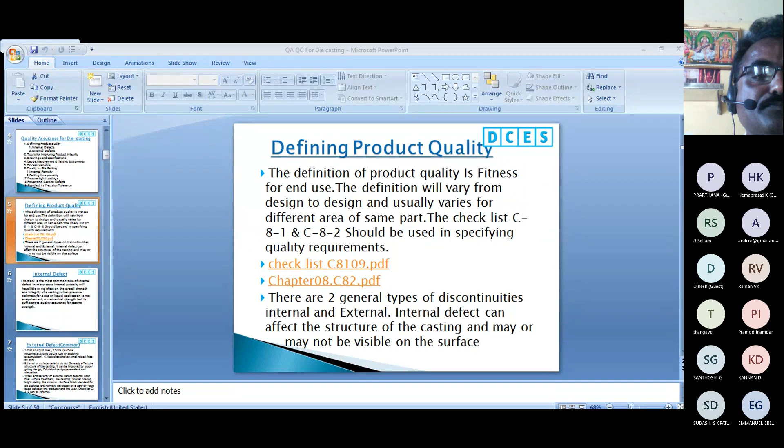Can you see? Yes, sir, please. Now I'd like to show the checklist.

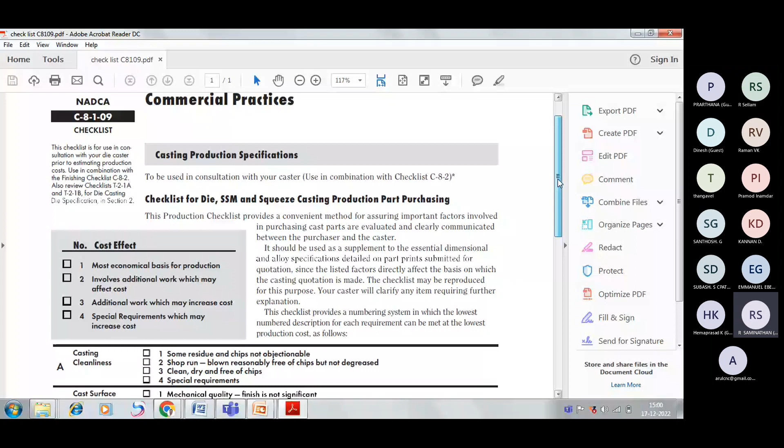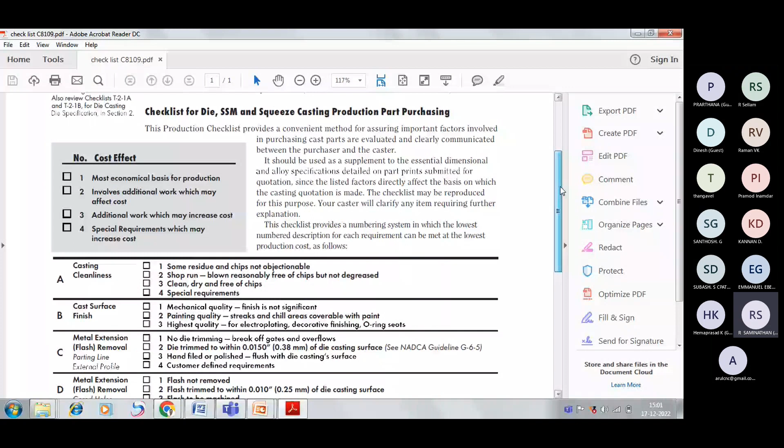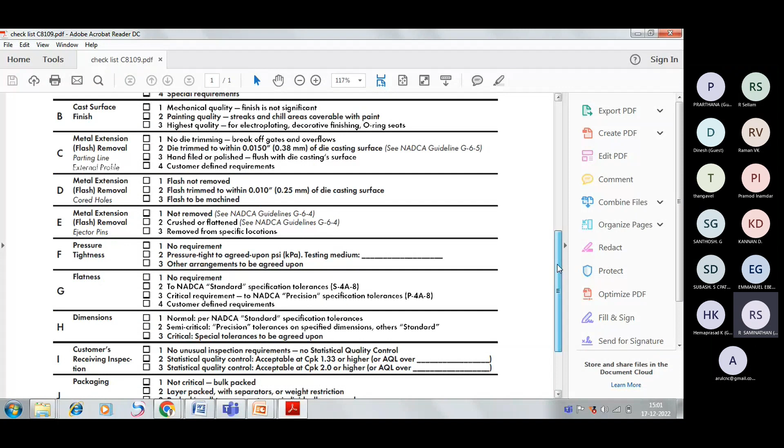So this is the checklist for the casting product quality specification. We cannot go through the full data here, but this kind of checklist, number C8109 from NADCA, can be used to define the quality, like casting cleanliness, casting surface finish, metal extension, flash removal, core holes, and things like pressure tightness, flatness, dimensions, etc. So many things are available here. From this checklist, we can use it to define the quality.

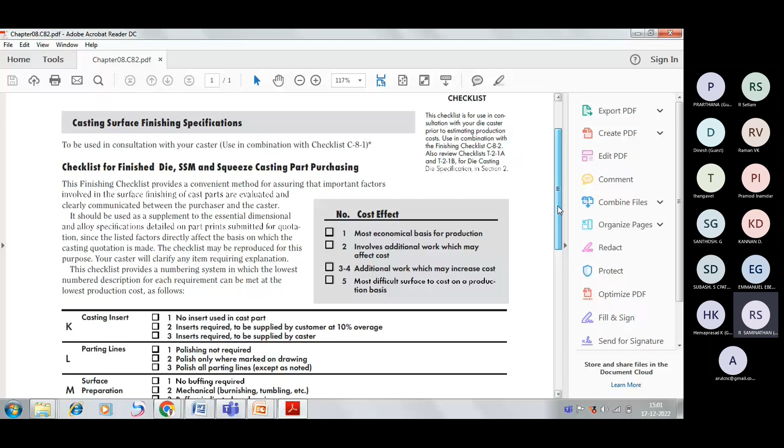So another checklist, this one also for casting - specific casting surface finish, casting insert, parting line, surface preparation, plating, anodizing, or other special finishing, painting, etc. NADCA has given many checklists that can be used.

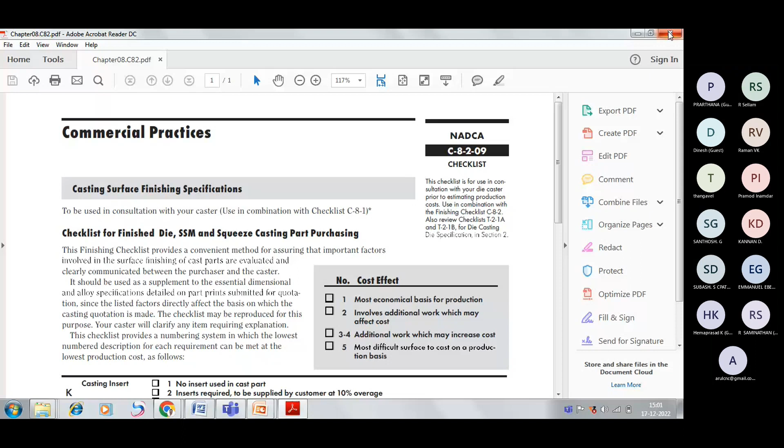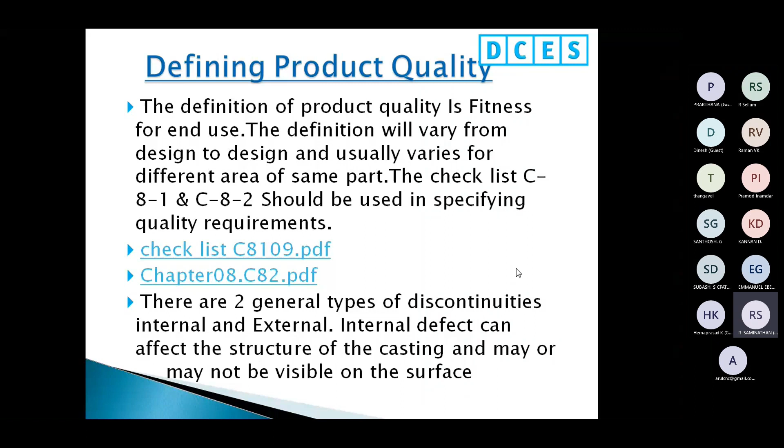There are two general types of discontinuities: internal and external. Internal defects can affect the structure of the casting and may or may not be visible on the surface. Porosity is the most common type of internal defect. In many cases, internal porosity will have little or no effect on the overall strength and integrity of the casting, when pressure tightness for gas or liquid specification is not required. Otherwise it is very important - the mechanical strength test is sufficient to qualify quality assurance for casting strength.

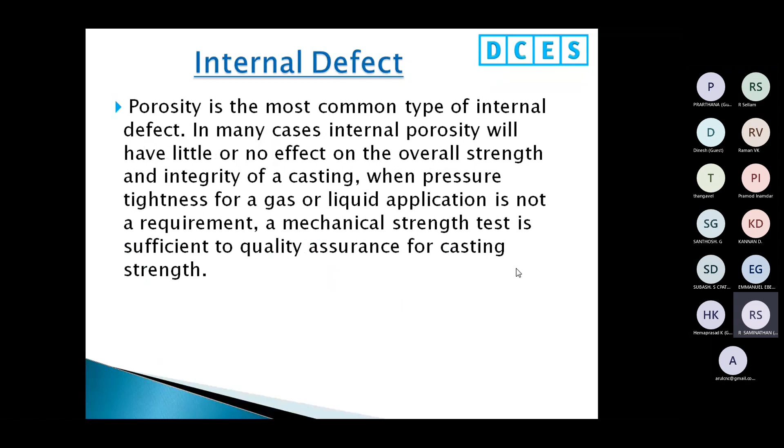Wherever the quality requirement asks for leak testing or pressure testing, it is very important to define the porosity level or internal defect. External defects, commonly called cold shut - that is knit lines, incomplete fill, snirls, surface roughness, build up, die soldering accumulations, heat checking, very small raised fins on part. This is called cold shut or other defects.

That is external defects. External or surface defects do not generally affect the structure of the casting. It can be improved by proper gating design, calculated design parameters, and simulations. Types and severity of external defect depend upon final surface treatment like painting, powder coating, bright plating like chrome.

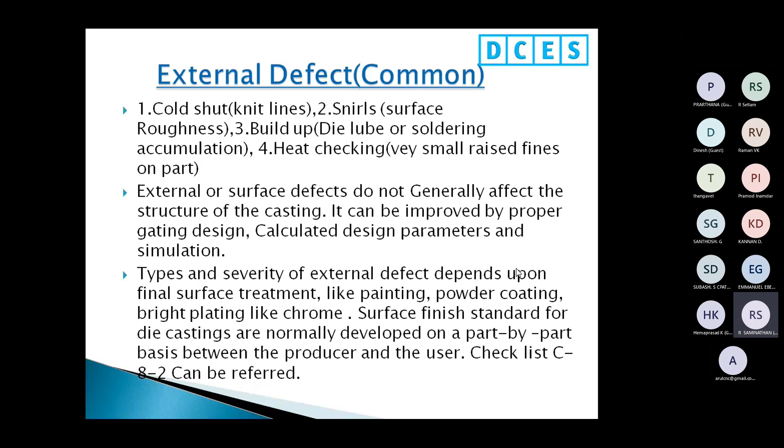Surface finish standards for die casting are normally developed on a part by part basis between the producer and the user. Checklist C-8-2, already shown you, can be referred. As-cast surface finish reference sample standard should be retained by all parties after agreement of the acceptable standard. Refer guideline G-6-6 for surface finish as cast.

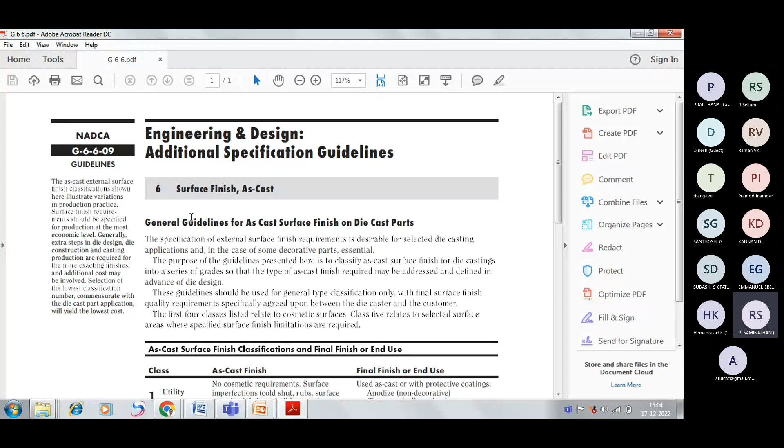This is also from NADCA, so I will show you the checklist - engineering design additional specification guidelines, surface finish as cast, general guidelines. If you go through that, you can get the guidelines for the as-cast surface finish as per the grade: utility grade, functional grade, commercial grade, consumer grade, superior grade, etc.

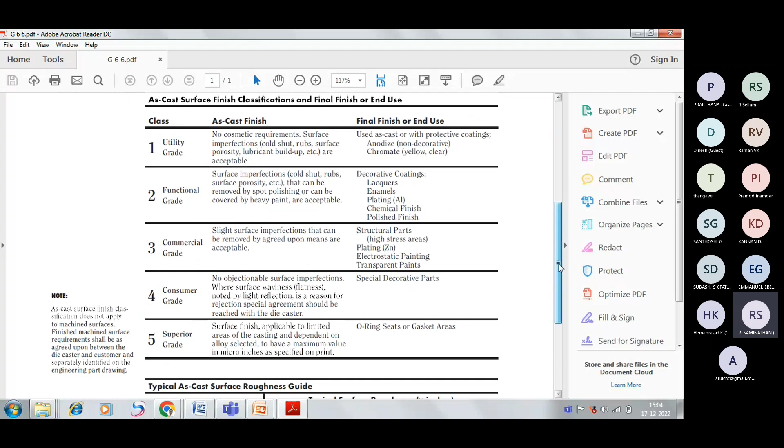Heat checking occurs during the life of the die when small cracks appear in the casting surface due to thermal cycling - cooling by spray and heating by incoming metal. Raised fins are removed by shot blasting, grit blast, or vibratory finish on the casting itself. For example, if the dies are used after 50 to 60,000 shots, the heat check mark will develop and reflect in the casting. It can be removed by shot blasting, grit blasting, or vibratory finishing.

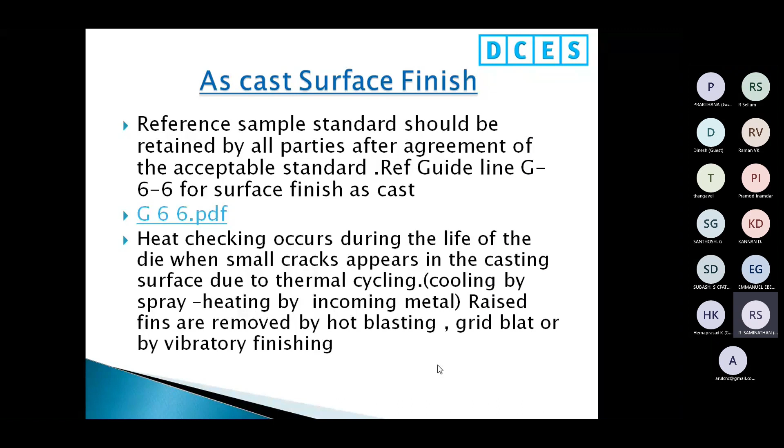The tools for improving product integrity - what are all the tools? Two tools can be used. The following tools are used for typical metal flow simulations: one is PQ square analysis, another is filling simulation.

Simulation can be used to optimize the heat flow, determine the location of cooling lines and cooling requirements. Simulation can also be used to predict die distortion, casting ejection temperature, and dimensional capability, last place to fill, and the area of poor fill or non-fill, and pockets of porosity, etc. So simulation can be used to predict this kind of defects in the casting.

They also indicate where the overflow should be placed, as indicated by the last area of the casting to fill. So when we try to place the overflow in the casting, this will show where the end of the fill is. The simulation will give an accurate depiction of the filling process and will verify the suggested gating profile.

Many times a runner and gate are cut only to give the results and not in the perfection mode of desirability. The simulation must be done prior to cutting steel. So here I suggest using the filling simulation before starting the tool manufacturing.

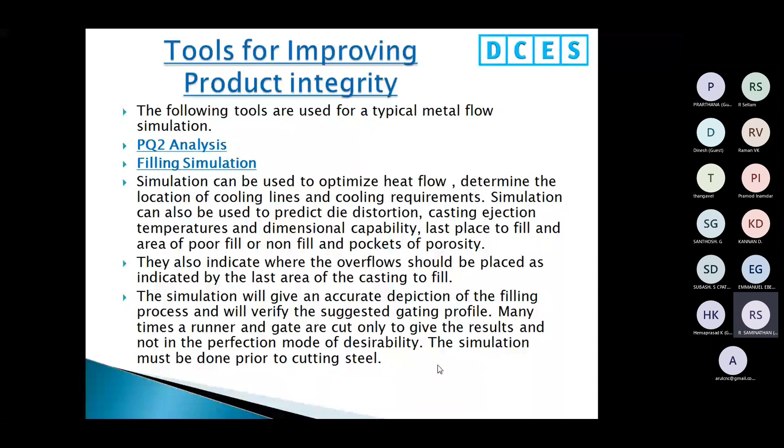So flow and solidification simulation - I can show you some small examples. If you already know this, not a problem, I will show here. Engineering should create a 3D model of the casting with the runner and gates connected and export the file in STL format for the simulation. One example I will show you for the simulation here.

Can you see the video? Hello? Yes, hello, sir. I think this kind of simulation is already known by people, but I insist on utilizing this without any negligence.

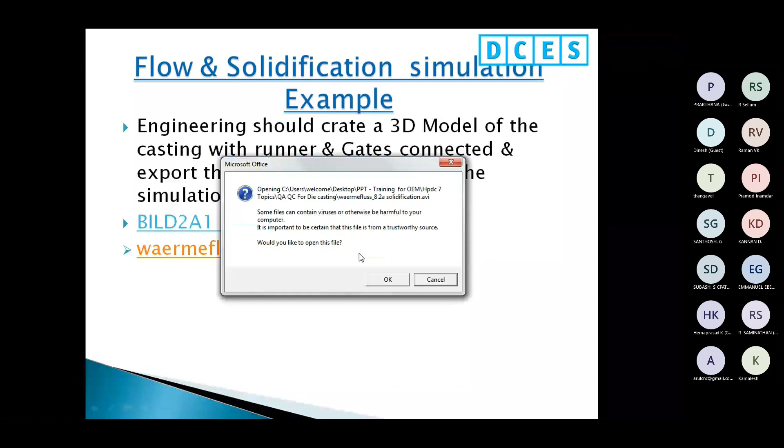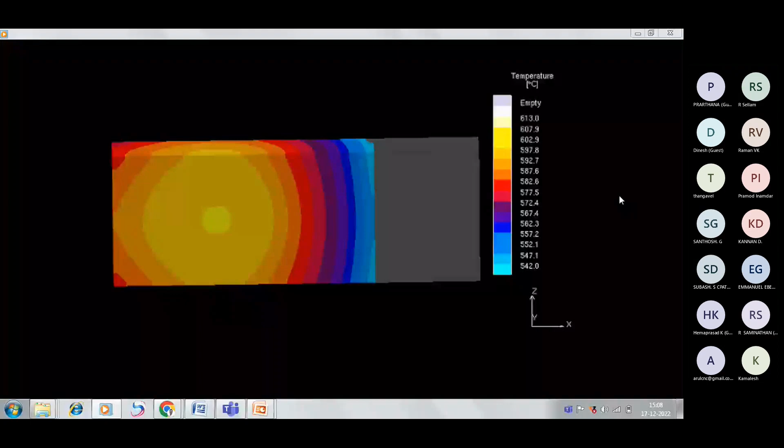PQ square analysis is one of the methodologies to find out the machine capability to fill the material into the die cavity. The PQ square analysis will yield the desired fill time and optimum gate area. The gate depth and location can be determined for the simulation.

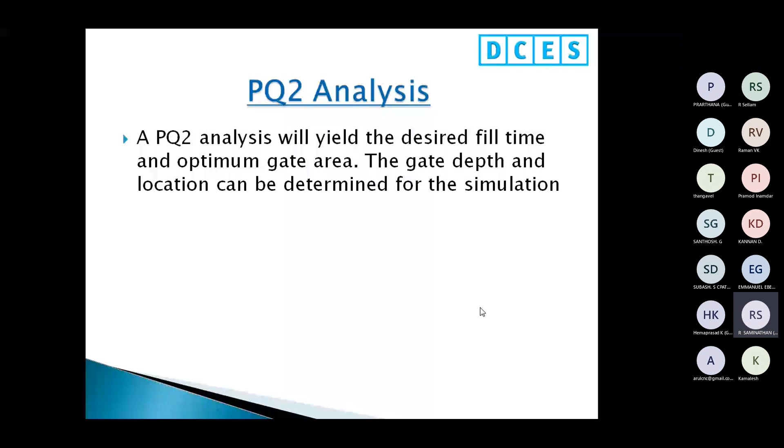This is the PQ square diagram. The vertical line is the metal pressure, and the horizontal line is the delivery, that is the cubic inch per second by the machine. This horizontal line is the machine power line. From here you can plot the machine power line, and the horizontal second line is the gate velocity limit line.

The other vertical line is the theoretical filling of the cavity, but this dotted line is the actual process operating window. This line should cross this window, then only the die is suitable for the machine. If the line is going away from the window, the machine is not capable. This is one type of methodology.

It will take more time to discuss, so I will just read through for your convenience. A completed PQ square diagram is shown below. Notice that the goal is to predict where a given die will operate when mounted on the machine with known performance, also shown in an operating window that is developed to match the needs of the casting quality requirements.

The objective is to make a design that will have the die and the machine operate within the range of the developed operating window. So by using the PQ square diagram, we can find out whether the tool can run in the machine or not.

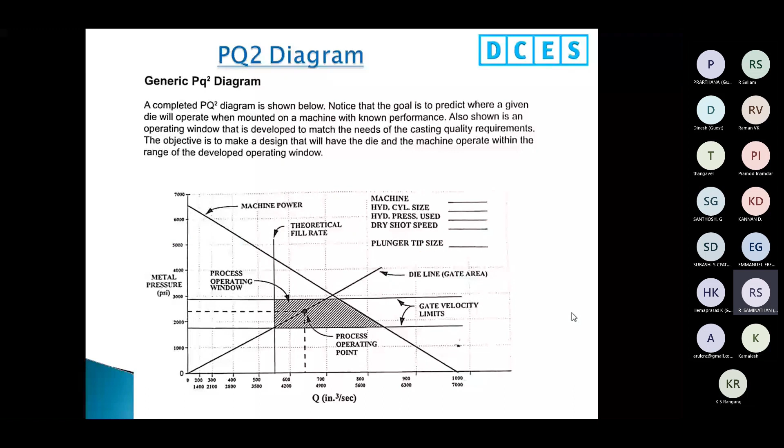Drawings and specifications: to ensure uninterrupted production to specification at the most economical level, it is important to supply all drawings and specifications to the diecaster with the RFQ. It is necessary that the drawings and specifications contain the following: all drawings should contain mostly 7 to 8 points.

So AQL, what are all the PPM levels, the datum location for machining, what are all the CTQs critical to quality, surface finish, engineering change note, ejector pin marks, trimming and parting line, non-critical area, standard for approval and rejections. For example, if they left out some of these points, the diecaster should ask the customer to give all the details during the RFQ.

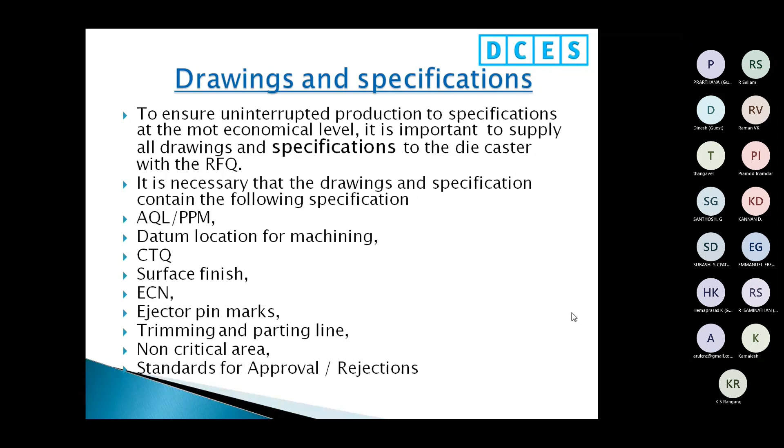In the drawings and specifications, I am putting here around 10 points: dimensions or areas that are critical, major or minor importance, and the acceptance quality level (AQL) and parts per million (PPM) level to which they will be checked, including the dimension for which the customer will be requesting control charts.

Datum location to be used for machining and gauging, and the areas to be used for special checking. The gauging procedures the customer intends to follow and the special gauges that will be furnished. Special requirements and the areas to which they pertain.

Coded surfaces on parts to be painted, and designating classifications of surfaces. Indication as to where die trimmed edges are not acceptable, and specifications of degree of metal extension removal required. This is also one important point.

You can refer to G-6-5 in section 6 of the NADCA specifications. Indications of any engineering change level requirements by purchase order and accompanying drawings, and specification of those surfaces which may not be used for location of the ejector pins.

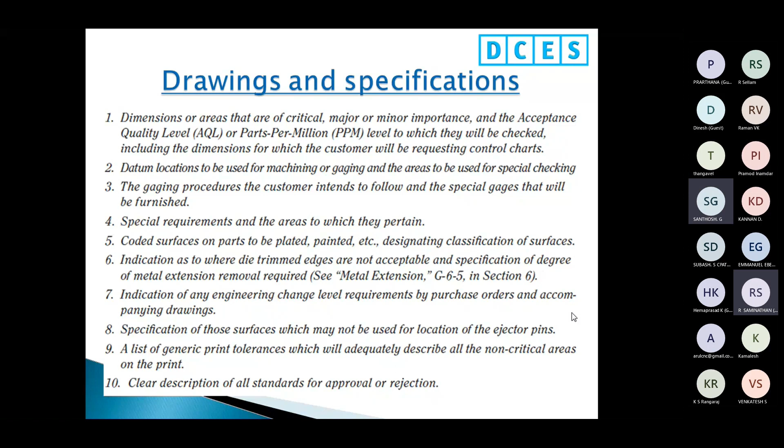Hello? Am I audible? Yes, sir, please continue. Yeah, I will take a few seconds.

Proper gauging equipment must be provided for effective measurement of product conformance. Special gauging requirements should be stated, and the responsibility for maintenance should be tabled on the RFQ. The customer should also furnish complete inspection methods and gauge design information to the diecaster.

Sometimes these points are left out. Why am I insisting on these points? It should be addressed during the RFQ and in the APQP stage for uninterrupted production of components. It is recommended that all gauging be qualified

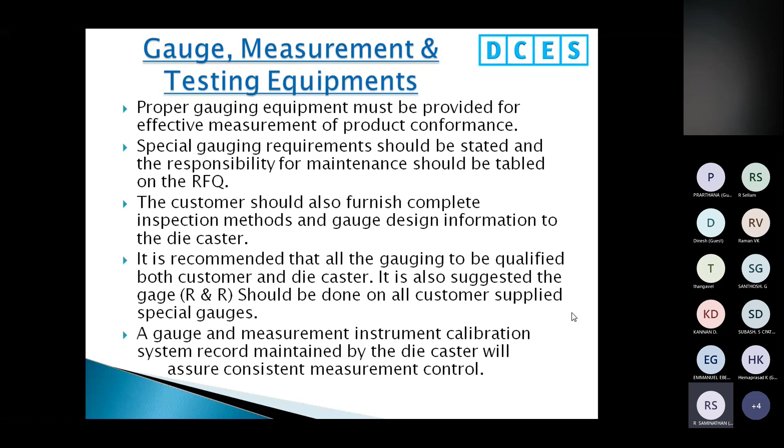by both customer and diecaster. It is also suggested that gauge R&R should be done on all customer-supplied special gauges. A gauge and measurement instrument calibration system record maintained by the diecaster will assure consistent measurement control.

The process variables: we will discuss the important process variables. There are 5 process variables that affect the quality of the casting. Metal analysis, that is the quality of the material, its composition, etc. The metal temperature, die lubricant characteristics, die filling conditions.

In general, die casting is a setup dominant process that exhibits variation of a serial rather than random nature. Of the 5 variables, only number 5, that is die filling condition, exhibits the continuous drift variation that traditional X-R control charts were conceived to monitor, so they can be used for the die filling conditions.

Variables 2 and 3, metal temperature and die temperature. Continuous monitoring systems are better suited to measure the variability of the temperature related variables. That means you can use a continuous monitoring system; some type of thermocouples can be attached to the tooling, sometimes in the material, to monitor the 2 variables.

Variable 5, die filling condition, consists of the elements of the shot profile that shot monitoring equipment can monitor and measure. For example, the slow speed, first phase speed, second phase speed, second phase starting point, and intensification starting point can all be monitored through the machine monitor.

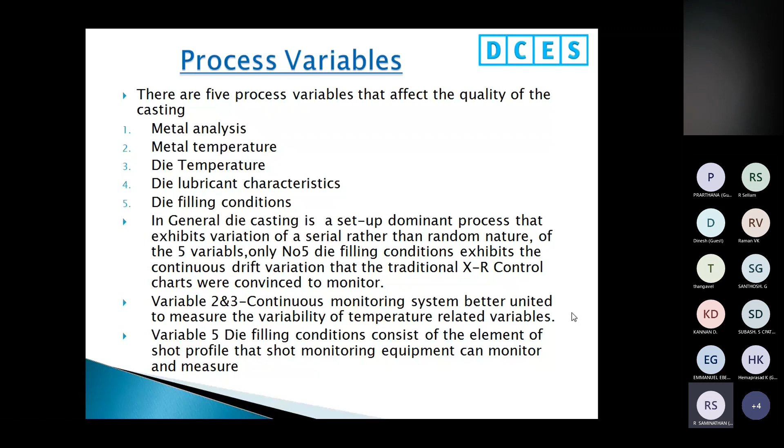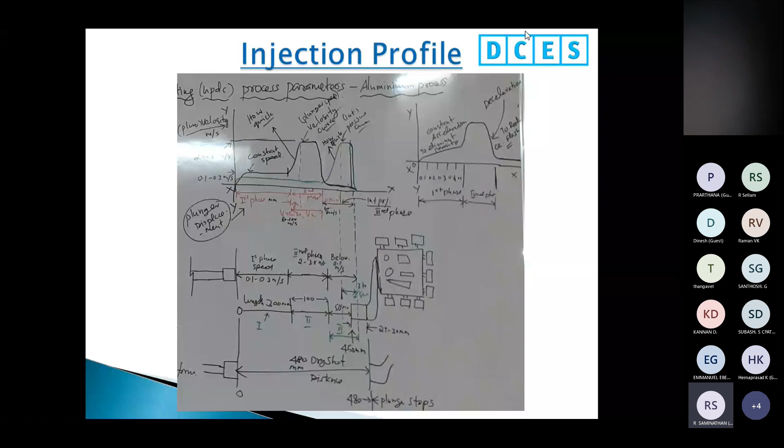The PPM level: part complexity, customer requirements, and level of processing contribute to the reject level. Process capability studies may be used to assist in predicting the PPM level for specific castings and secondary process assemblies. Ultimately, the PPM goal or requirement should be as agreed upon between the die caster and the customer. So the PPM level should be defined properly for all the processes.

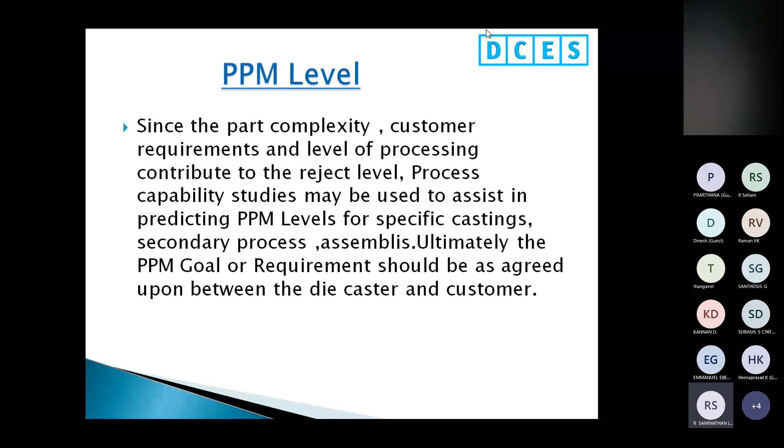Porosity. This is a very major issue in die casting. We will discuss porosity more elaborately. It is usually necessary to address porosity when specifying the die casting. While porosity specifications are very difficult to define, there are existing guidelines that provide a good starting point.

Can you see my cursor here? I am moving it. Hello? Can you see the cursor? Yes, sir. Yes, sir. Yeah.

The skin, which has a fine grain structure, begins at each surface and extends inward to a typical thickness of 0.38 to 0.5 mm. That's why, for the machining allowance, if you go more than 0.5 mm, the porosity will be exposed to the surface. So we ask for less than 0.5 mm. This area is usually free of porosity compared to the center of the section. The porosity is located between the skins in the core.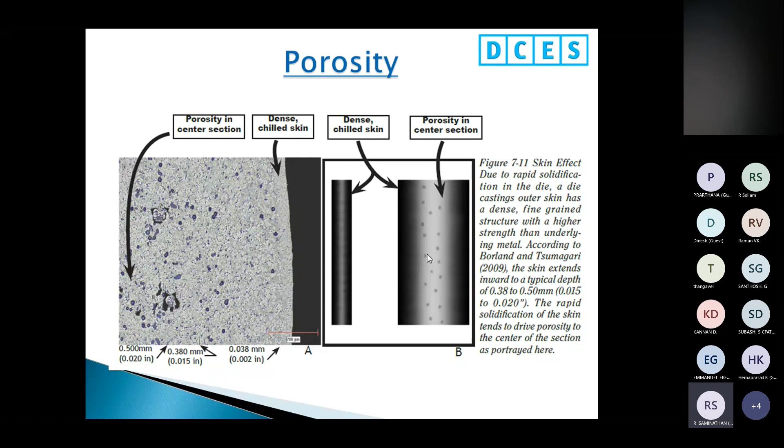Exposing porosity. The removal of the skin to depth greater than 0.5 mm by machining increases the chances of exposing porosity in the core, as can be seen in figure 7-12. Exterior or surface porosity can be identified with the naked eye, by magnifying, and by penetrant inspection test. This is usually what we are doing.

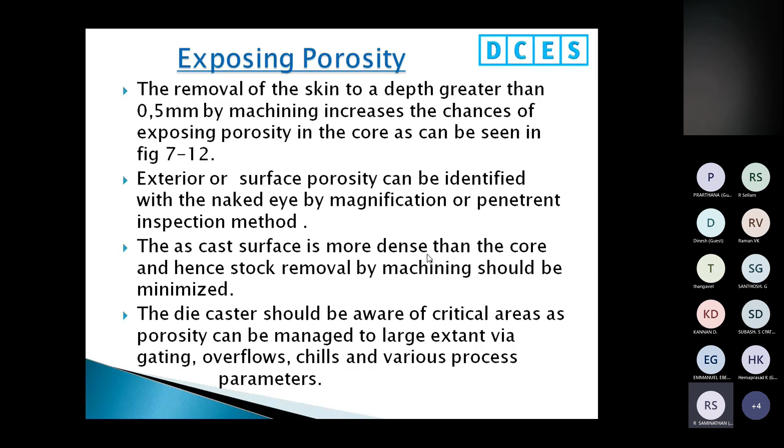The as-cast surface is more dense than the core, and hence stock removal by machining should be minimized. The die caster should be aware of critical areas, as porosity can be managed to a large extent via gating, overflow, chill, and various process parameters. So the porosity standard should be taken care of during the die design by a proper gating system, properly allocated overflows in the casting gating system, and chill vents.

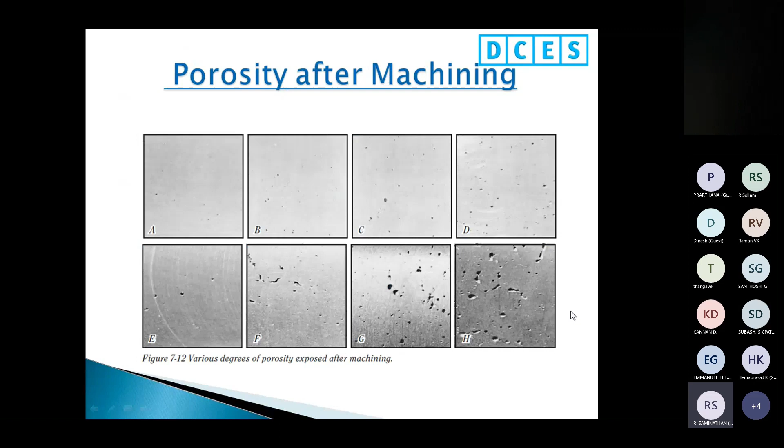This is the porosity after machining. There is a classification of various degrees of porosity exposed after machining: A, B, C, D, E, F. So you can see this is one type of defining the porosity.

NDT method of inspection. Castings can be inspected by utilizing non-destructive inspection techniques, NDT; when specified, a reasonable detection level should be employed. Non-destructive testing methods for internal porosity detection include radiography, X-ray film, real-time ADR, automatic defect recognition, and various weight techniques. The weight technique can be used only for small components, not for bigger components, where it cannot be detected. For external porosity detection, visible and fluorescent dye penetrant, DPI methodology, can be used.

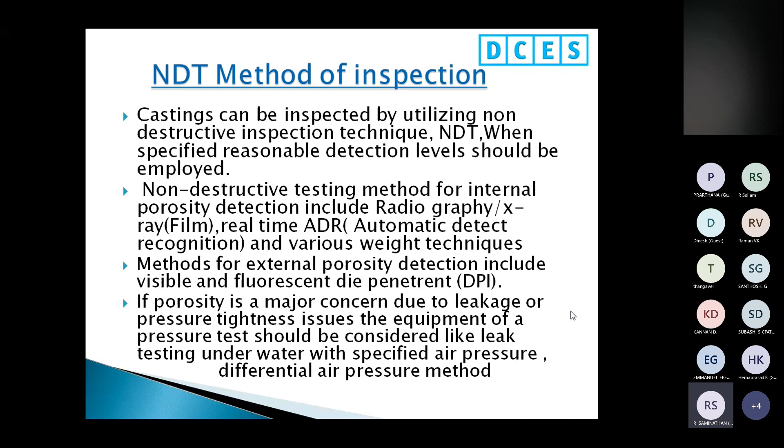If porosity is a major concern due to leakage or pressure tightness issues, the equipment for a pressure test should be considered, like leak testing underwater with specified air pressure, or differential air pressure. Two methodologies can be used. The underwater methodology is a very cheap method. The differential air pressure method is a costly method.

Internal porosity. Internal porosity can be detected by a range of techniques, including detection by fluoroscope, X-ray, and ultrasonic procedures. Internal porosity can also be detected in the die casting plant through sectioning and simulated machining techniques when the die caster is advised of the areas to be machined. This we are usually doing in all die casting plants by cutting the component.

Part prints should call out the areas where only the lowest level of pinpoint porosity can be tolerated, areas where additional porosity can be tolerated, and areas where large porosity will have no effect on the casting application. This all should be noted in the drawing itself.

Whether porosity levels are defined by X-ray or sectioning procedure, each party, being the die caster and the customer, should retain the sample radiograph or part section that defines the minimum acceptable standard. I already showed figure 7-12.

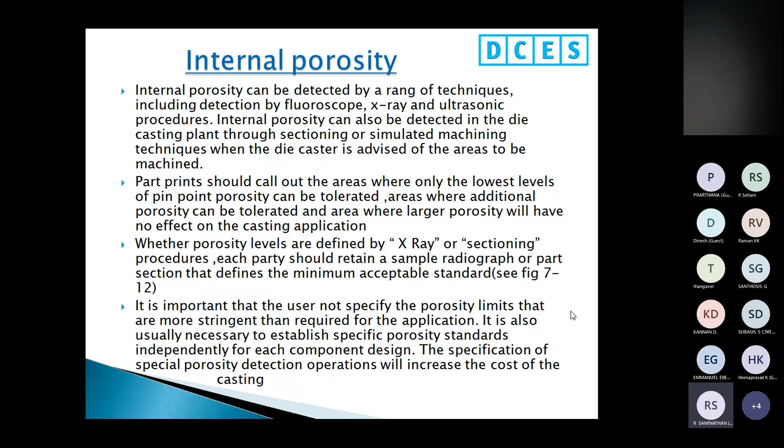It is important that the user not specify porosity limits that are more stringent than required for the application. It is also usually necessary to establish specific porosity standards independently for each component design. For each and every component design, the porosity standard should be defined. The specification of special porosity detection operations will increase the cost of the casting. Only if it is necessary should we do it; otherwise, it's not necessary.

Porosity inspection by cut section. This exact sample is shown here using the wire cut methodology, to see if any porosity is present during the production of the casting.

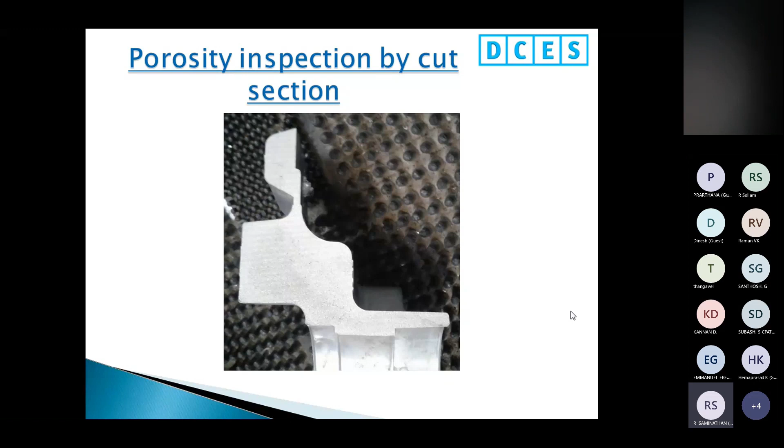Porosity standard. The type of porosity may be important in defining a porosity standard. A small dispersion of smooth round holes, salt and pepper, generally less than 1 mm in diameter, which are caused by a release of dissolved hydrogen in the molten metal or entrapped gas bubbles in the molten metal, may have a minimum effect on the part strength and will not tend to cause leaks. So sometimes pores smaller than 1 mm won't give much problem in the strength of the casting.

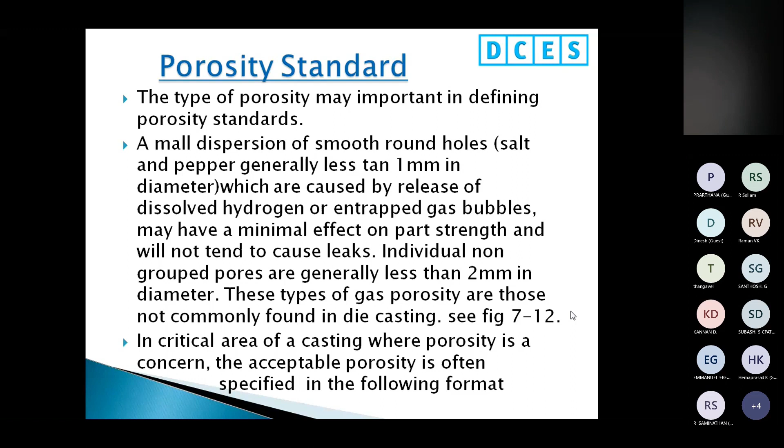Individual non-grouped pores are generally less than 2 mm in diameter. These types of gas porosity are not commonly found in die casting. In critical areas of the casting where porosity is a concern, the acceptable porosity is often specified in the following format. So this is one type of methodology to define the porosity, specifying the porosity level.

The maximum allowable size of the individual pore, how much size is allowable, the minimum allowable spacing between two pores, and the maximum allowable density of the pores in the defined area. That means the pores per distance squared. For example, in 1 square centimeter, how many pores are acceptable, and the density, spacing, size, everything.

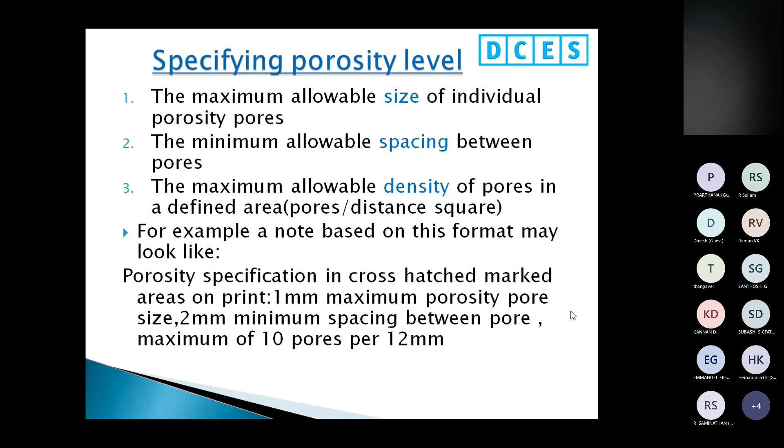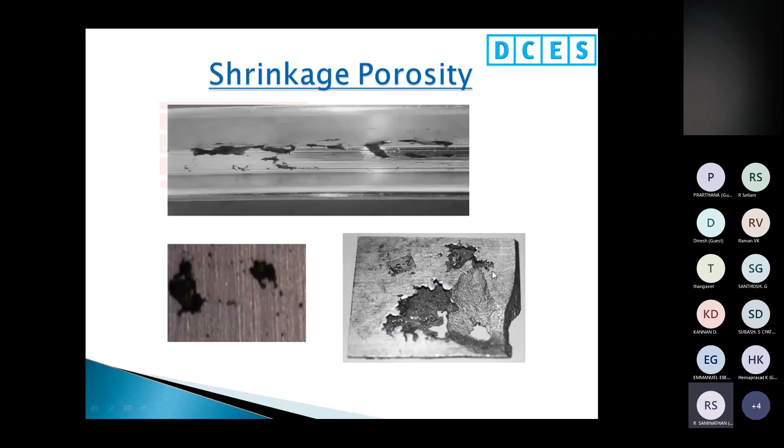So, more jagged-shaped shrinkage porosity is caused by solidification. During the solidification it can cause more problems. This is typically a part design related issue and is caused by heavy sections in the casting. So whenever you have big heavy sections, you have to be cautious about this kind of porosity. Then we can speak with the customer to modify the product design.

Shrinkage porosity can be interconnected and may result in leakages. The shrinkage porosity does not have to be visible to cause leakage and is often microscopic in nature. Shrinkage porosity, when exposed, can be larger than the gas porosity. Normally, the shrinkage porosity will be larger than the gas porosity.

For instance, a typical specification for a large drilled and tapped boss is less than 2 mm on the first 3 threads and less than 5 mm on the other threads. This is one type of specification. Minimizing porosity begins with upfront planning in the design of the part and die casting die, and the management of the heat in both the die and the casting, and the injection conditions. So this is the shrinkage porosity already shown.

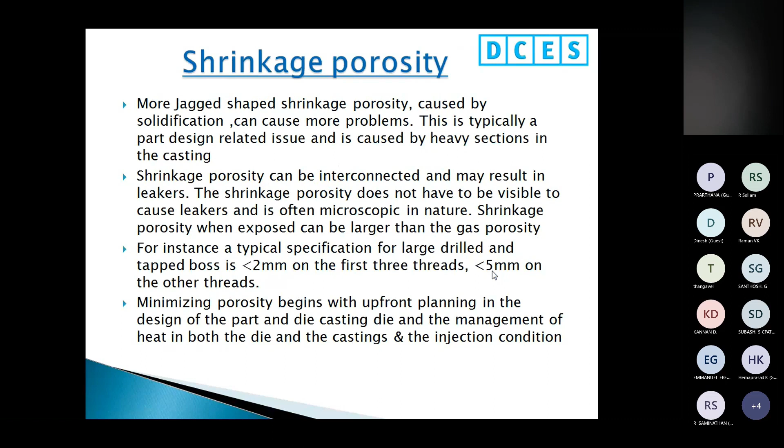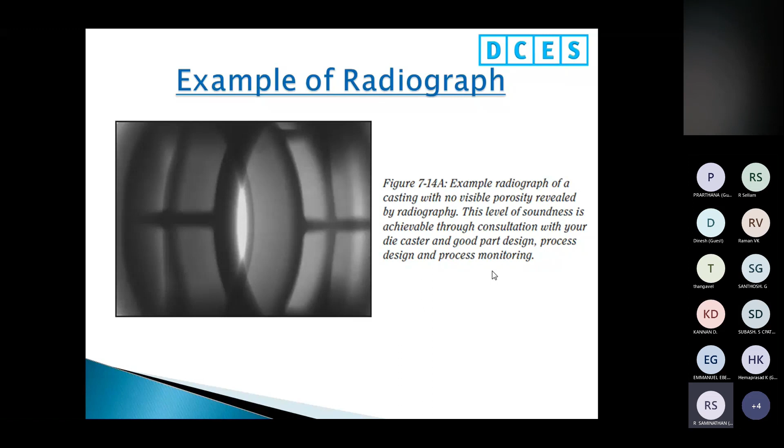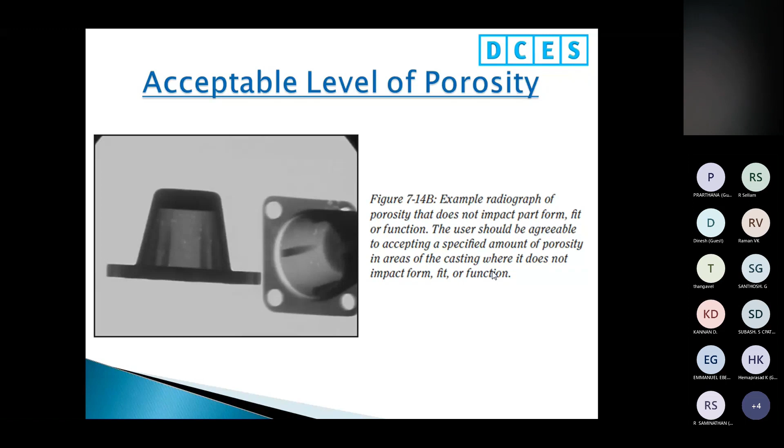Sophisticated process control and monitoring equipment as well as simulation software is best utilized for castings with stringent porosity requirements. If specific porosity will be detrimental to the use of the product being cast, the die caster must be informed of the area that will require special control to reduce the incidence of such porosity. Otherwise, the die caster should ask the customer.

This information must be supplied in detail at the time of RFQ so that precautionary measures such as part design change requests, accountability for higher scrap, or utilization of special processes can be taken in advance of the die design and construction. Since zero porosity is virtually impossible to achieve in a die casting, the size, nature and location of the permissible porosity should be identified by the customer with the agreement of the die caster.

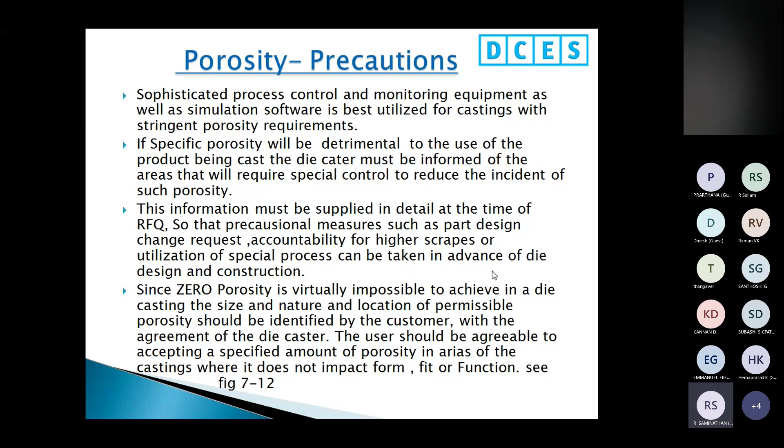The user should be agreeable to accepting a specified amount of porosity in areas of the casting where it does not impact form, fit, and function. You can see I already showed the 712. After this webinar, if anyone needs the data, I will share that. ASTM standard for porosity level. The ASTM non-destructive testing standard E505 provides reference radiographs for inspection of aluminium and magnesium die castings. This can be used for reference.

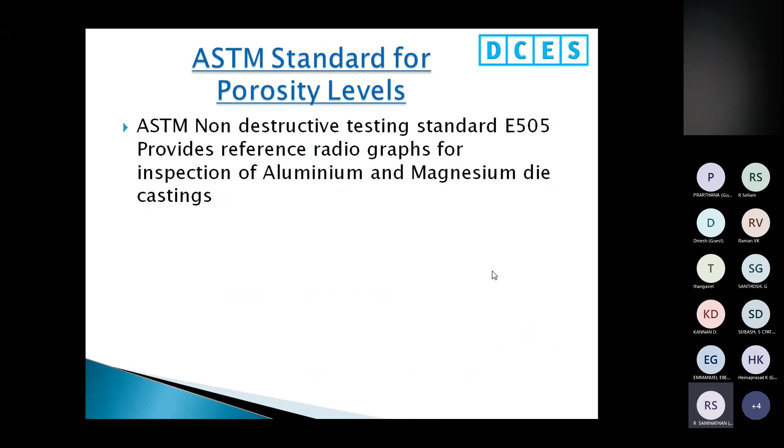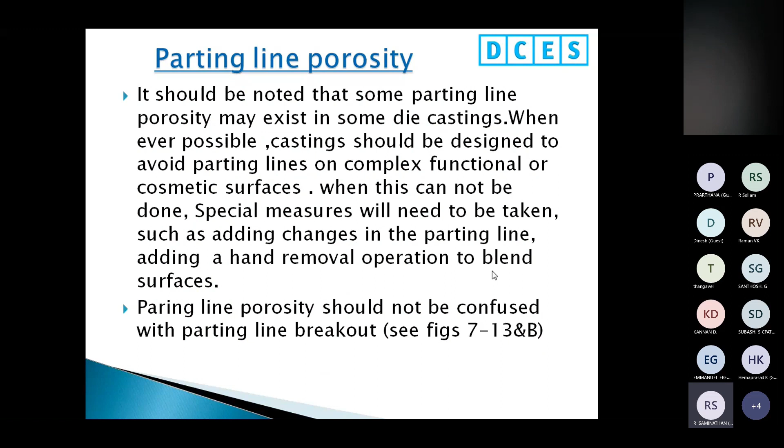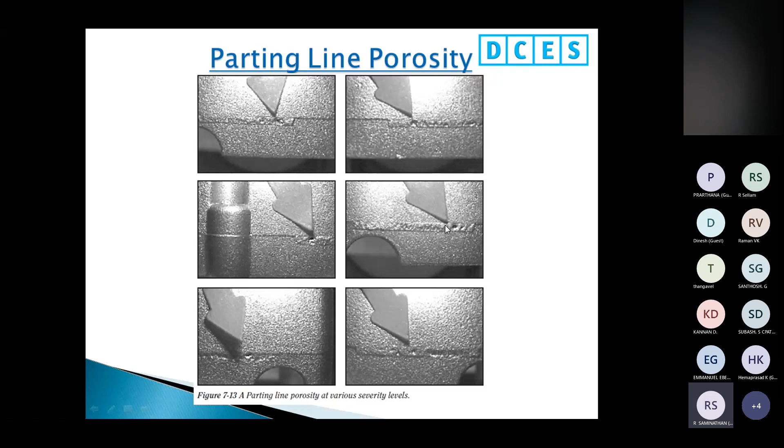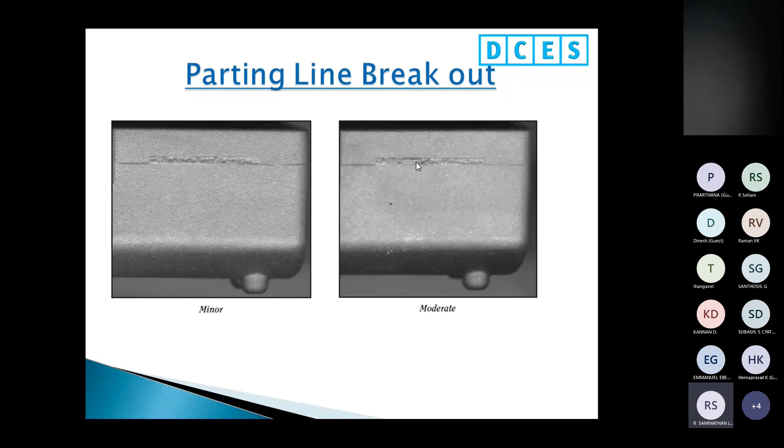You can see here, this is parting line porosity. You can see the examples. This is the parting line. There is a gate porosity. We call this porosity in the gate, in-gate or in the overflow gate. These are all parting line porosity. This is parting line breakout. That means there is no porosity, but some portion of the material came out during the trimming or degating operation. So parting line porosity and parting line breakout should not be confused. This is also one type of parting line breakout.

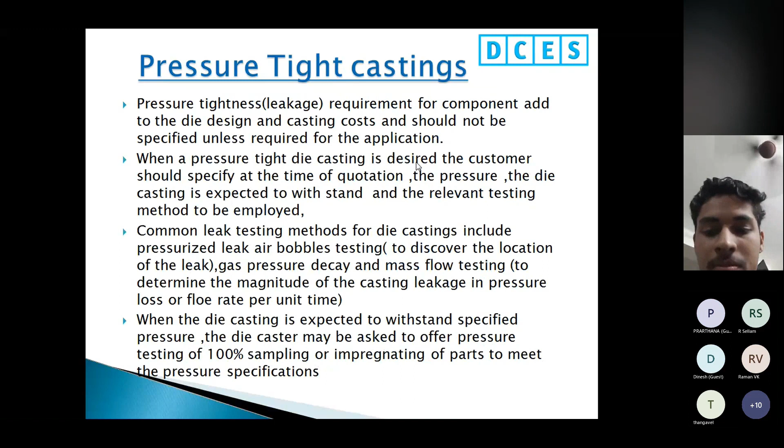Pressure-tight castings. So for pressure-tight castings, the leak requirements for a component add to their die design and casting cost and should not be specified